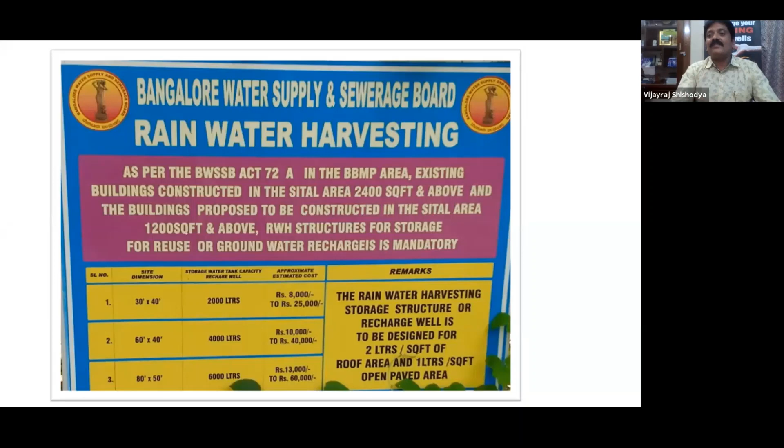He has not understood. I was in Calcutta under a metro station, and it was raining that day. A tanker was coming and feeding one of the hotels there. And in front of his hotel, from a 6-inch pipe, the whole water was gushing out. He's paying for the water, and the same water is gushing out and causing waterlogging somewhere. So people have not applied their mind, though it is not rocket science. The application of common sense has not been done.

With the new buildings coming up with hollow blocks, people have generally started using hollow blocks. If the clamping system is not properly fitted, these pipes come out. We have seen that within 1 to 1.5 years of installation, these pipes generally come off, and the whole system has gone for a toss.

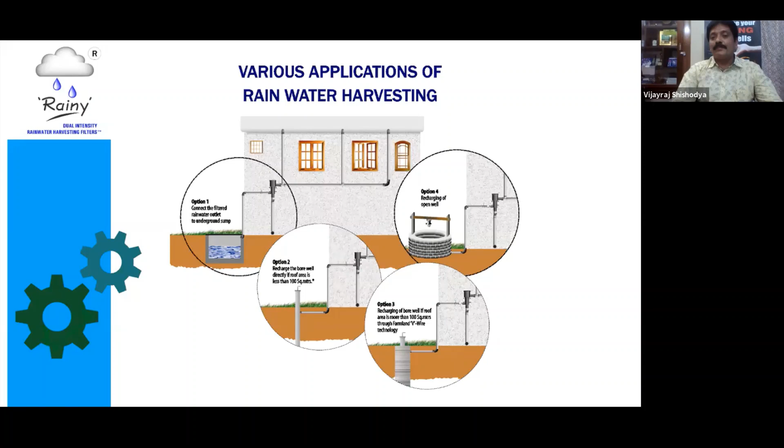Second, in urban areas, wherever we are putting it in the public domain, we are generally using conventional filters, wherein all the dust, debris and leaves come and settle down. So if you are not able to clean after every rainfall, they start decaying. Or a thin layer of fine dust is formed that restricts the water from flowing down to the filtration bed.

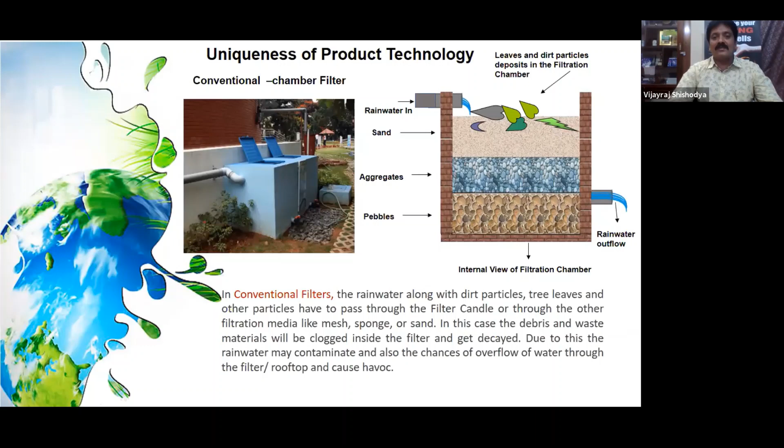So there is regular maintenance, because of a lot of trees and leaves coming down. Every time you have to go and remove them, which in urban areas becomes very difficult, and in the public domain, particularly in hospitals, schools and all, they don't maintain it properly. Then it becomes obstructed. In every filter available in India, you can find there are ball valves here. You have to open these ball valves after every rainfall, or frequent cleaning has to be done to drain out all these leaves, dust and debris. If not done, the whole system gets into trouble.

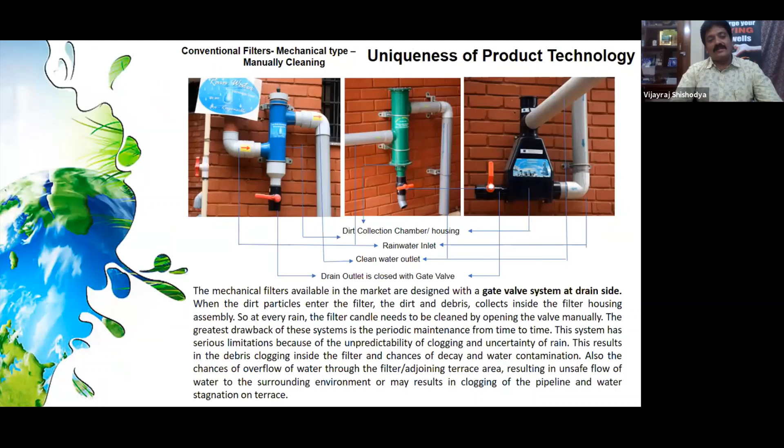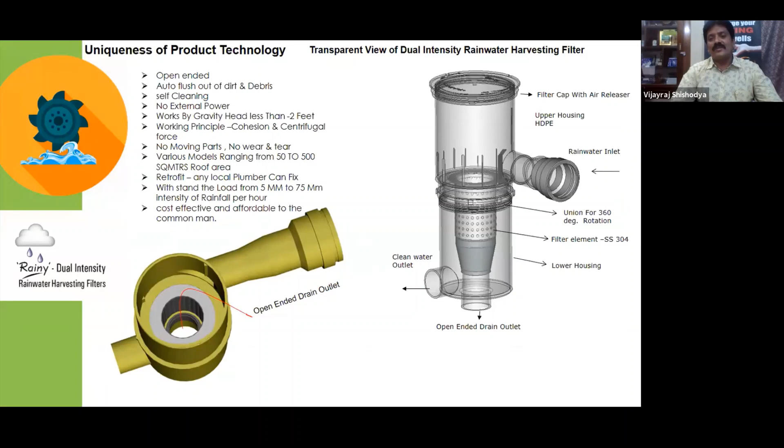So, to the contrary, after extensive research, a filter has been developed which works on centrifugal force and cohesive force. All the water that enters this filter, all dust and debris is thrown off, and the clean water comes out on the other side. So the maintenance becomes less. Here the ball valve is provided at the clean water outlet, so that you can do the first flush, but not in the drain water outlet, where all dust and debris falls out automatically. One more advantage of this filter is that the first 90 seconds of water always goes out, then only the water starts coming in. So the first flush also takes place.

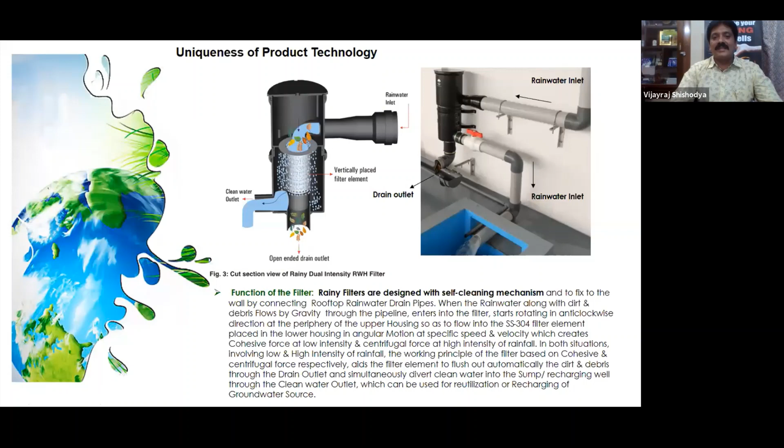Now coming to the installation part, as I said earlier, every 1 meter these kinds of L clamps have to be provided. And the proper gradient has to be given: for every 50 feet, at least 1 foot, a 1:50 gradient. If there is sufficient gradient, there will not be any choking, and we get enough height because of the water column. We are getting the water from huge heights. If proper gradient is given, there will never be choking.

And the selection of the pipe is very important; it is the main priority. When you are joining the pipes, you have to see what kind of water flow we are getting and calculate the free flow accordingly. On an average, for 25 mm of rainfall, 1 square foot of roof area gives about 2 liters of water. So 1000 square feet of roof area gives about 2000 liters per 25 mm. But when designing the system, it is always better to take the rainfall intensity at 50 mm. The whole system should be able to sustain 50 mm of rainfall. Then implementation becomes easy and sustainable.

We have implementations done 20 years back that are still working fantastically well today. So for implementation, one is the diameter of the pipe, calculated for about 50 mm of rainfall, so 1 square foot we take as 4 liters, and the other is the tank size. Generally, according to the international standard, 50 mm of rainfall. If you have 1000 square feet, 4 liters per square foot into 1000 square feet is about 4000 liters. So the minimum tank size we require is at least 4000 liters for rainwater harvesting. Generally in Bangalore, we have seen that people are using the regularly existing sump only.

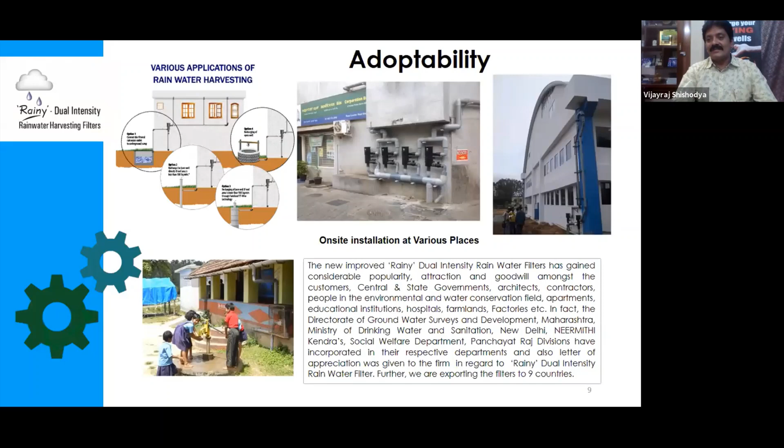They're filtering the water, putting this water into the existing sump only. From there, overflow is sent to the borewells. Likewise, we have to design the tank size.

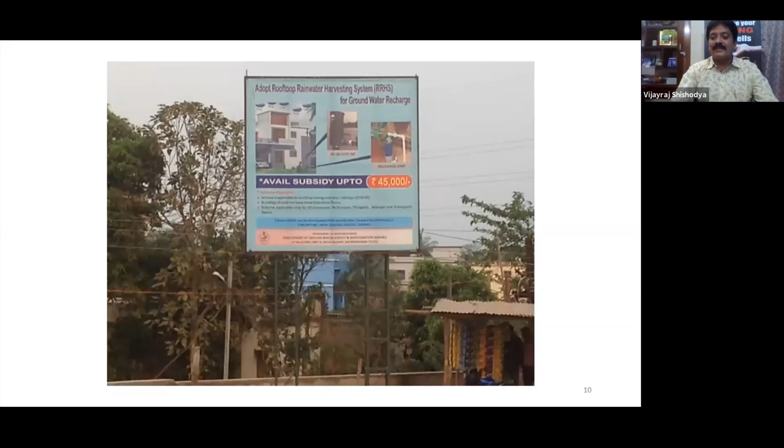Here, many of the states have now awakened to rainwater harvesting, and they have started giving subsidies. One of the first to announce the subsidy for rainwater harvesting, piping, as well as the filters was Bhubaneswar, Orissa, wherein each and every house was paid 45,000 rupees as subsidy to implement rainwater harvesting. We installed more than about 2 lakh installations over there with our wide network, and we trained plumbers also. So they have implemented more than 2 lakh installations in Bhubaneswar.

And coming back to the agriculture field, generally what we see is, per acre of land, with just 25 mm we get 1 lakh liters of water. Out of that, 20 to 30% percolates. The rest all goes as runoff water. During runoff, there is one more loss we are incurring, because when the water runs off, it is taking the topmost soil also. So the farmer is deprived of the top soil. The top fertile soil is also going.

If you are able to do rainwater harvesting properly in the farm, which doesn't cost much, with minimal investment, they can do rainwater harvesting. Even at 500 mm of rainfall, if you take the lowest, except for a few parts in Rajasthan and Gujarat, even in the majority of the areas of Rajasthan you get about 500 mm of rainfall. So on average, on an acre of land, 20 lakh liters of water is falling. Out of that, even if you take 30% as loss, still you're able to get about 14 lakh liters of water.

If you are able to save this water, because even in most drought areas, once in 3 years you have flooding there. So during the flooding, if you are able to push this water into the ground, then we can recoup it back. One of the best examples, we did it in Hyderabad, in the Gachibowli area, which is on Deccan Plateau rocks. We had hard rocks there, and water is available at more than 1,200 feet.

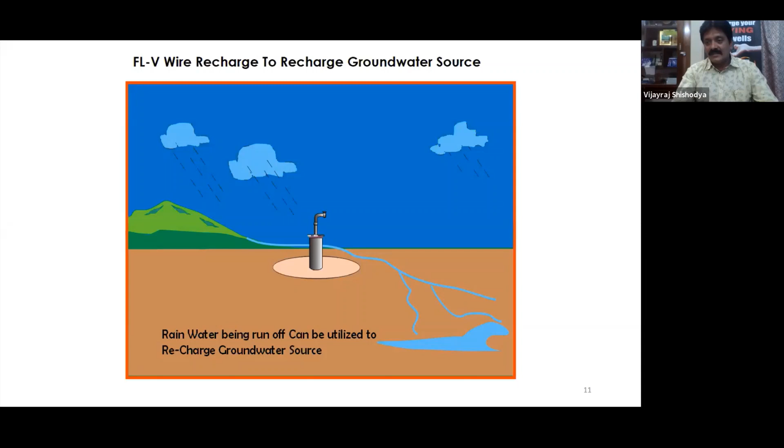So generally, everywhere it is advocated that we should make pits and leave the water. Pits are very good for subsurface recharging. If you have open wells and you make continuous pits, it will help you get water for the open wells. The subsurface will be recharged. But with the advent of time and borewells, we have forgotten open wells. All our open wells have become dustbins.

If we are able to revive our open wells, we will be able to get water in them for about 8 to 9 months. Only because we were not getting water for the last 3-4 months, this well system started failing. People started forgetting the wells. But now what we suggest, as Vishwanath always suggests, is that we should go for 1 million wells in Bangalore, so that you can avoid flooding and the whole water table can be brought up. You need not bring water from anywhere else. You will have sufficient water here. There will be no water logging.

So likewise, these recharging pits, which have been advocated everywhere, can be used for subsurface recharging. But after 20 feet, 40 feet, the water doesn't percolate, because we have clay mixed soil in the majority of areas, and then we have rocks below. So the water is not reaching the aquifer, meaning this is not recharging our borewells much.

For example, we have many lakes here which are more than 25 or 30 feet deep, with water 365 days. But in the vicinity of those lakes, we don't find water. The borewells are as deep as 1,000 feet. This means just by putting pits, we are not able to recharge the borewells. Here in the injection well, you can see on the left hand side of the screen the injection well concept, wherein you have a proper silt trap system.

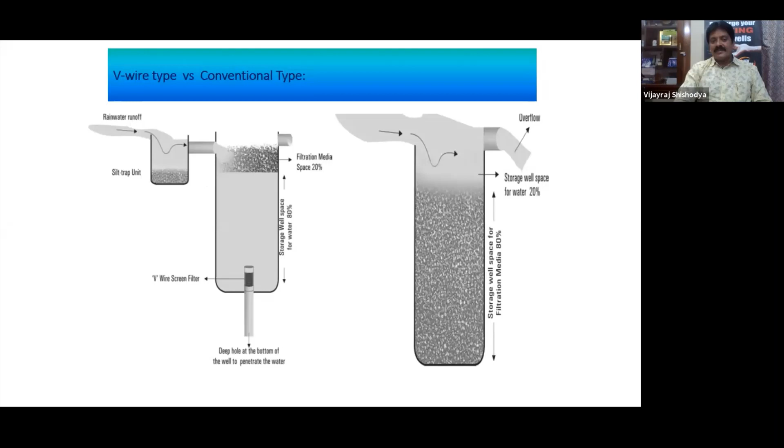At the entry point and the bottom point, we provide a V-wire screen, a special component which is flat externally and V-shaped internally, so that a lot of water can enter but it doesn't allow sand and dust particles in because of its formation. Huge volumes of water can enter through this.

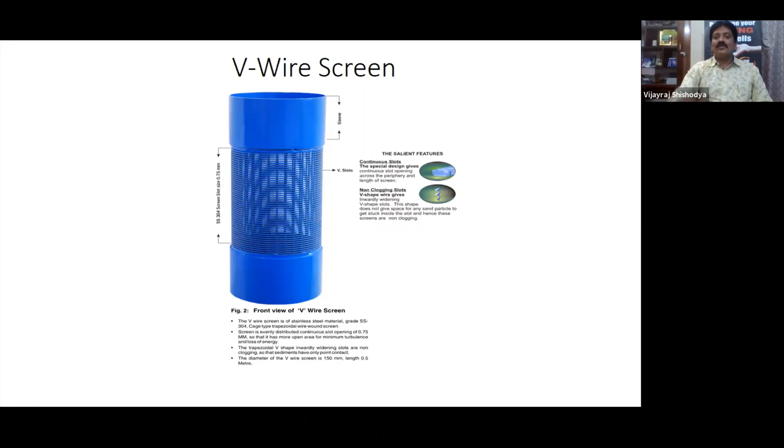This is the typical injection well. You can see here the water flowing, with channels made so that you can supply this water to the silt trap. From the silt trap, the water is allowed to pass into the main injection well.

Here the filtration media is only at the top. We fortify this filtration media using chlorinated activated carbon. We use charcoal, then silica sand, then pebbles and so on. So we fortify this filtration media, and then the whole well is kept empty, so that it can store the water, and then slowly the water can percolate.

This acts as what we call an injection well, because it creates a kind of water column due to its height, which helps in pushing the water into the deeper layers. When you measure this pressure at the bottom, we get about 4 to 5 bars of pressure which can push this water into the dried zone, and thereafter it gets filtered through the earth crust and goes into the deeper aquifer.

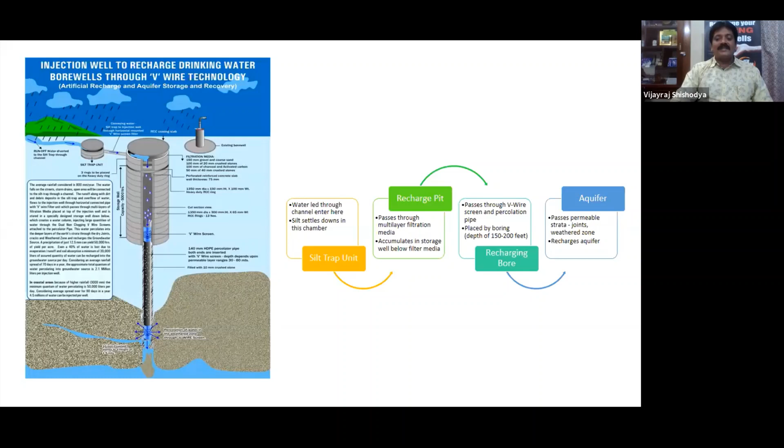We have installed more than 18,000 injection wells in the last about 18 years we have been doing this. It has been very well accepted, and it is located next to the drinking water borewells, about 18 to 25 feet away depending upon the geologist's advice. Many of the drinking water borewells in the Government of Karnataka's rural drinking water scheme have adopted this technology, and it has been very successful.

You can see here, this is a typical picture of how this injection well works in the field. If you had seen this nala, otherwise it would have taken this water along the gradient. The water would have just flowed beside the borewell. This is the drinking water borewell here, which supplies water to a village. The water would have gone down to the low-lying area somewhere down there.

Now what we have done is, after the proper geophysical survey, the whole water is now allowed into the silt trap, which is constructed in the storm drain only. There are a lot of pits made before this, so that water enters into the pit, and by the time the water reaches this area, it is pretty clean. This water enters the silt trap, and from here the water goes to the injection well.

Because it is nearby, it is just allowed to go to the first permeable zone, and thereafter the water gets filtered through the earth crust. If you take 1 meter by 1 meter of compressed earth, that compressed earth is the best filter compared to any other filters available on earth. When the water passes through that compressed earth, any impurities left over can be filtered, and then it slowly takes its own sweet time to reach the aquifer.

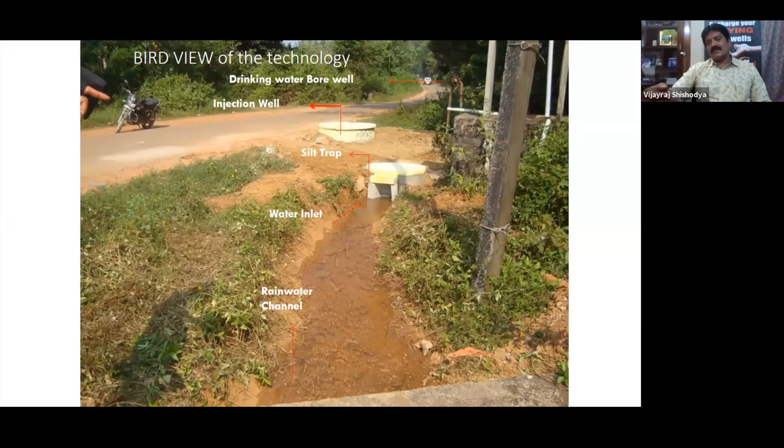By that time the water is pretty clean. These are the first of its kind rigs in the world, probably only two. Rigs are generally meant to remove water from the earth, but these are the first two rigs developed specially designed to be the only rigs in the world meant only for recharging. They are used only for recharging, not even a single drop of water is removed using these rigs.

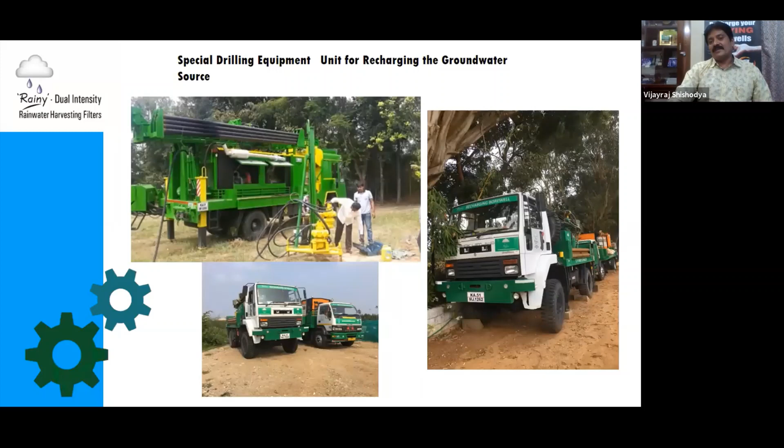So these are the kind of equipment that have been specialized and developed so that we can achieve a perfect result. These are a few of the case studies we'll be discussing, both in urban areas and in rural areas, where this kind of injection well has been installed, using the whole of the surface runoff water.

What we do is, when the surface runoff water is taken, we ensure the entry point accounts for about 1 or 2 inches depending on the calculated catchment area, so that the first bit of rainfall drains out. Only after the water rises a little does it go in. Then a proper filtration media is installed, and the water is taken care of.

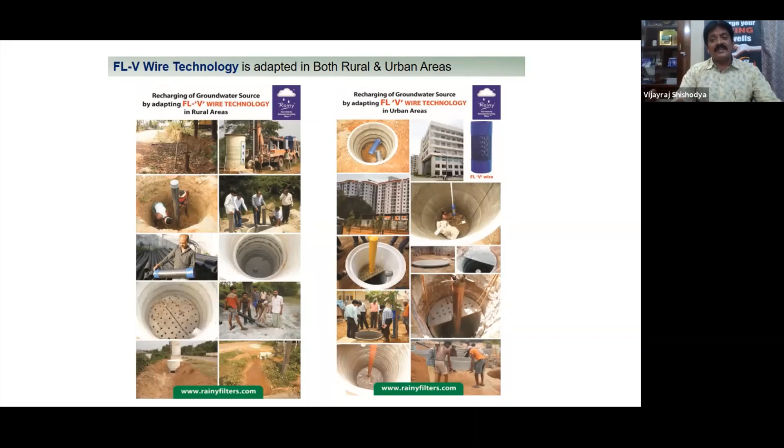We have seen injection wells able to take anywhere from 3,000 liters per hour to about 2 lakh liters. One injection well we did for a nearby village in Tibegur had a potential of taking 2 lakh liters per hour. That was the kind of potential it had.

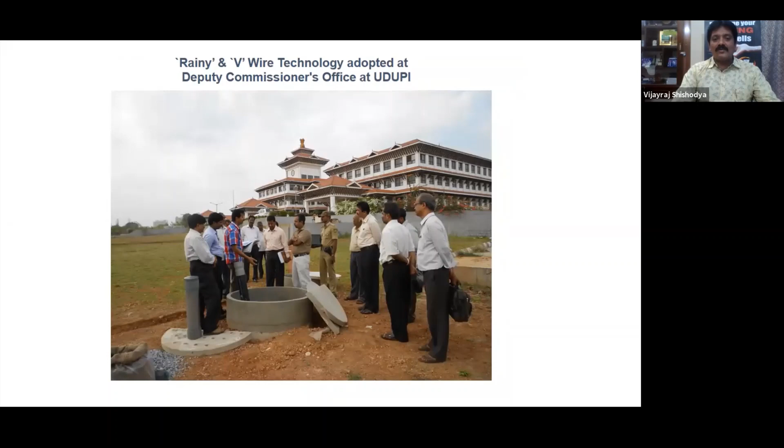This has been installed in all major districts of the country, where it has been proven and then taken into different applications. This has particularly now been used even for water logging, which we'll discuss later.

This is a case study of a rural agricultural bore that had dried up, for a farmer named Bettamaraiah near Tumkur. When we met the secretary for water at that time, Mr. Naveen Raj Singh, and gave him a presentation, he said, 'I don't believe your presentations. I want one practical demonstration. I'll give you one dried borewell - if you're able to rejuvenate that, then I'll believe this technology is successful.'

This Bettamaraiah had about 2 acres of land with three borewells, all of which had died. His son had moved to Bangalore for work because the borewells weren't working. So we took up his borewell as a pilot study, and he said he would personally monitor the system.

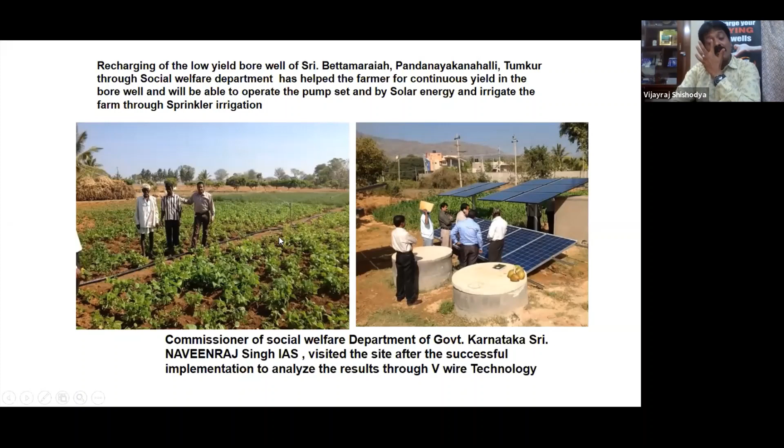This is how it was successful, and thereafter he became one of the people who advocated for these injection wells everywhere he went.

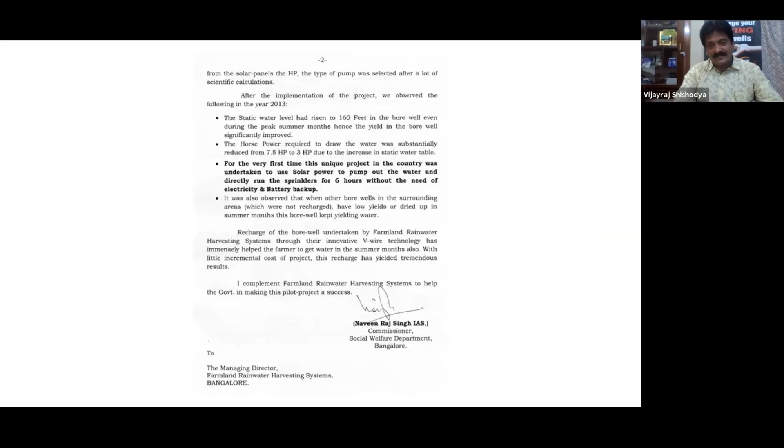These are rooftop installations, where the entire rooftop runoff, after proper filtration, is used for drinking in an IT industry. People have some apprehension about drinking this water, but if it's given proper treatment and passed through common means, it's safe. Our Shivakumar sir has been a living example for over 20 years - he has been using this water alone, and he is healthier than any of us.

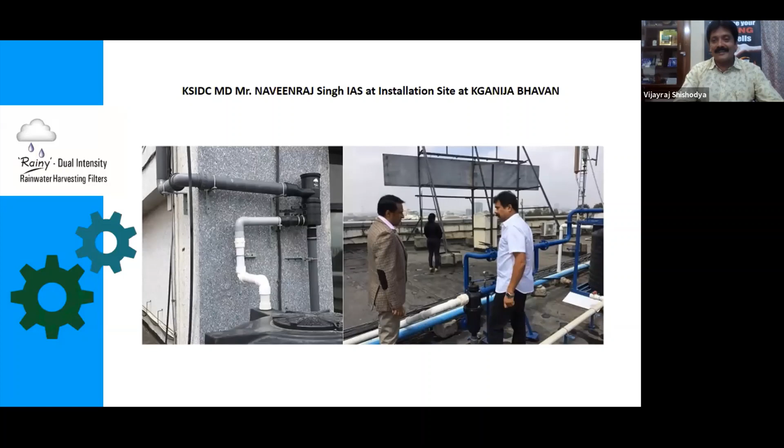These are some rural installations. Many rural borewells have been installed with this kind of system. This is a CEO in Chamarajanagar where we installed more than 240 injection wells. A team from Times of India visited because we had applied for an Earth Care Award, and they wanted to visit and verify on the ground.

A team of 12 members came, including an eminent scientist. Everyone visited - we had done the installation in 2010, and they visited in 2012. They could see that only the borewells adopted with our injection well were working, because those two years were drought years with very scanty rainfall. Only those borewells with this injection well were functioning.

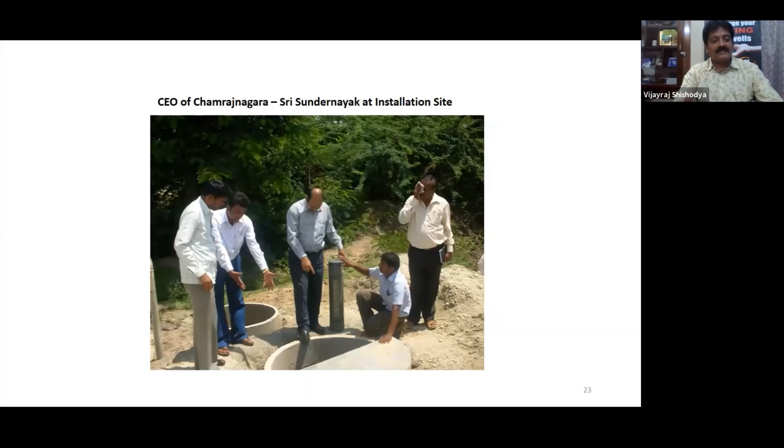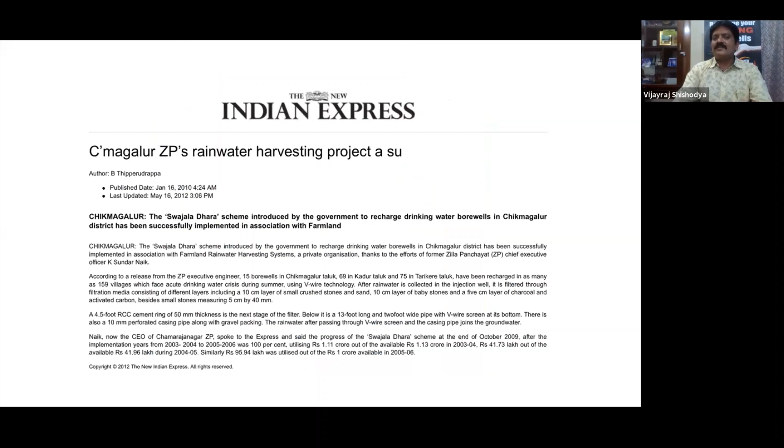So in this we got an Earth Care Award, and Times of India was even awarded 5 lakh rupees cash prize for this. This whole thing, the majority of the villages they adopted, and then they were extended. So this has been tried and proved.

Now what generally happens in urban areas, you see these software companies have huge campuses of 300, 400 acres sometimes, with a lot of water moving out of their campuses. Majority of them have more than 10-20% paved areas, then buildings, and the rest open area. But still, because of the lot of movement of water, there used to be huge wastage.

So we have installed this V-wire screen in these areas also, then recharge. One of the IT sites in Chennai, with 25,000 seats, 40% of annual requirement is met by rainwater. That is one beautiful case study, in Mahindra City, wherein with 25,000 seats, 40% of their annual water requirement is met by rainwater alone.

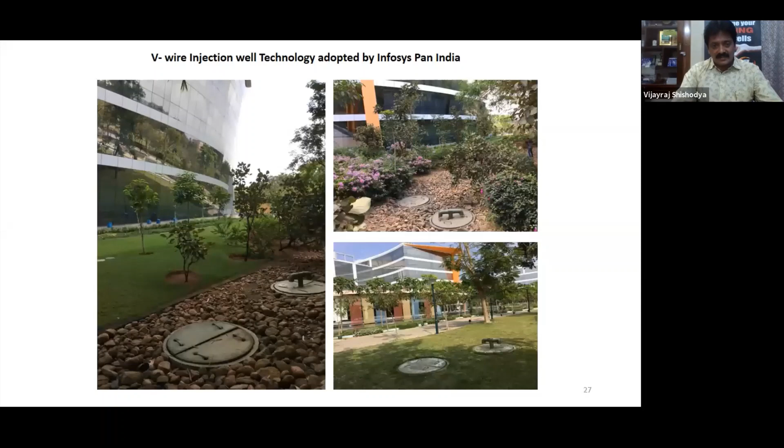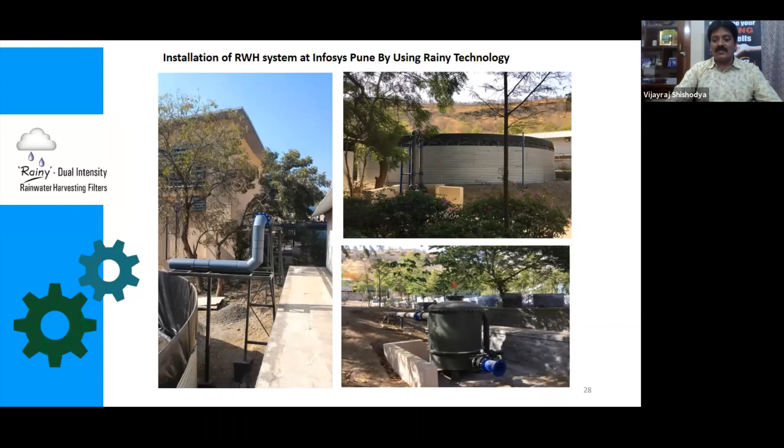These are the low costing tanks we have adopted for rainwater, because return of investment is now being calculated by these companies. So unless we are able to break down their return of investment, and we are sure that it is one of the best returns you can get, even compared to gold, bank, or any other investment. We have seen that their return of investment on huge structures like this is 3.5 years, because they are buying water from outside. Their cost of water per kiloliter is around 100 to 150 rupees. So they are saving huge water cost, and within 3 years they are getting their return on investment. So that is one of the factors.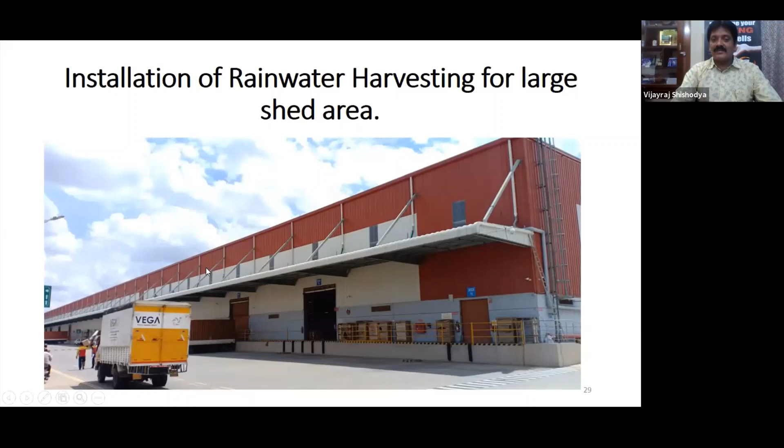One more thing we have to take care of is, when going for large installations like this, we have to provide the overflow system. You can see here there is an overflow system. This is very important because it will act against air blockage, since when you're running pipe of about 1 kilometer, 2 kilometers, lot of air blockages will be there, or even if you're crossing 100 feet, there needs to be an air vent. So if you provide these kinds of overflow pipes, this will act as an air vent also.

You can see it is raised a little above and then lowered again. So whenever there is a heavy downpour, because recently in 3 hours we got about 104 mm of rainfall, in those kinds of situations, or if there is a cloud burst, this water will not damage the pipe. This is a safety system that should be adopted in each and every installation. For small houses it is okay.

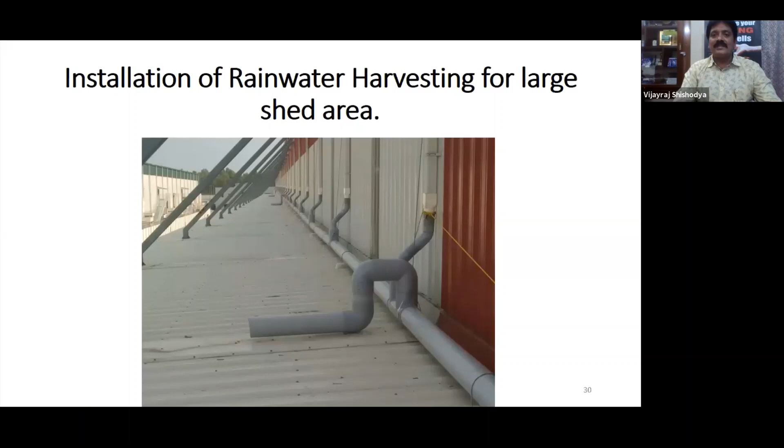We have another 5 more minutes for the presentation.

Yes sir, yes sir. So this is also one of the factories, one more factory where you can see all the water is brought into one chamber jackwell system. From the jackwell system, it is pumped. These are the bigger kind of filters, about 500 meter cube, 100 meter cube. 5 lakh liters of water can be pumped in 1 hour. That kind of filters are custom made by us, and we can use it for this.

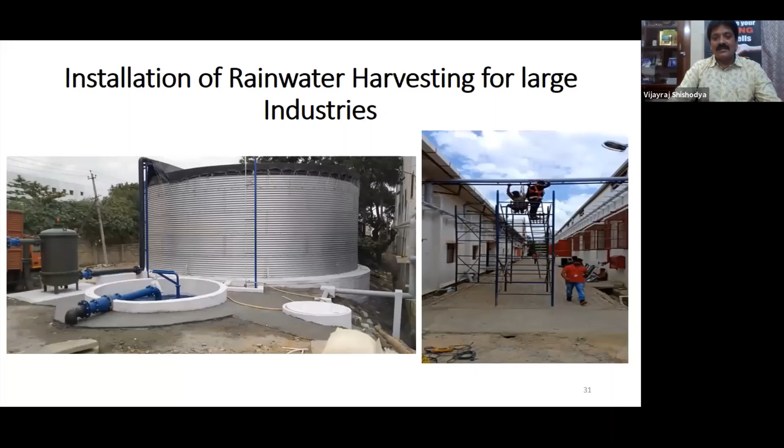This is one of the garments factories wherein they had a water crisis. Today they are water self-sufficient. We are putting water meters which are a crucial part of our installation, because anything which can be measured can only be saved.

So you can see this water meter has been installed, and we try to use a lot of HDPE pipes, because their durability, their life is more than 40 years and they are non-carcinogenic. And this, you can see the air vents here. I have shown you this because of easy installation; once the clamping system and the air vent system are in place, nothing can happen. A system can run up to 40 years without any intervention.

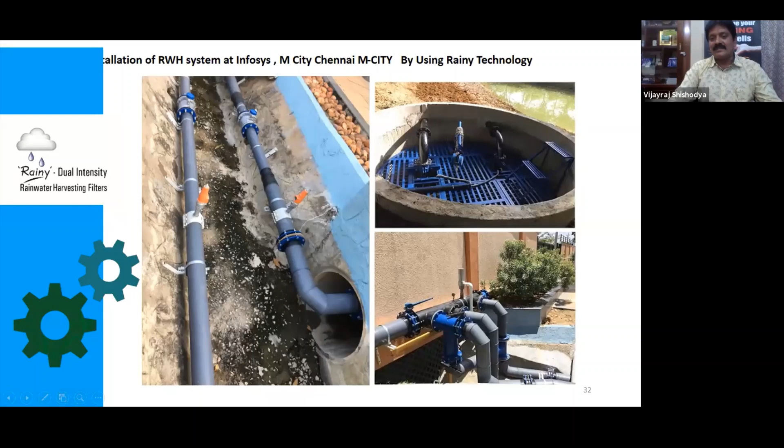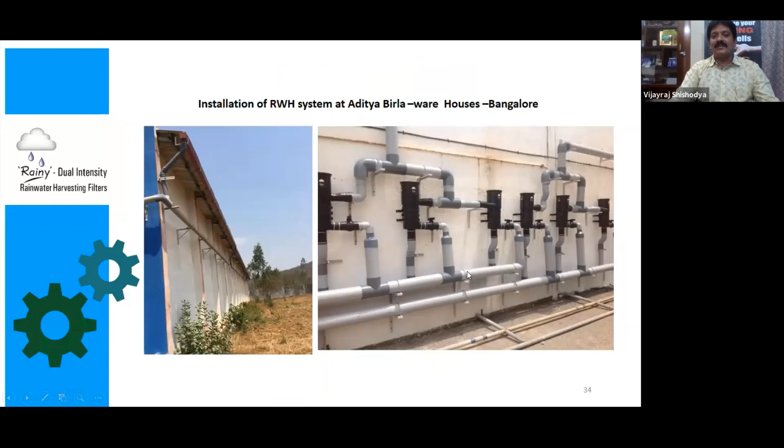Here on this right hand side, you can see the jackwell system, wherein the whole pumping system is there with all the precautionary measures, which pumps the water to the filtration system. These are the customized filters for the larger areas, and when you have smaller areas, you can have parallel filters. You can install a lot of parallel filters like this, run them into a main line, and then water can be let in. We have installed, in Karnataka alone, more than 3,600 schools.

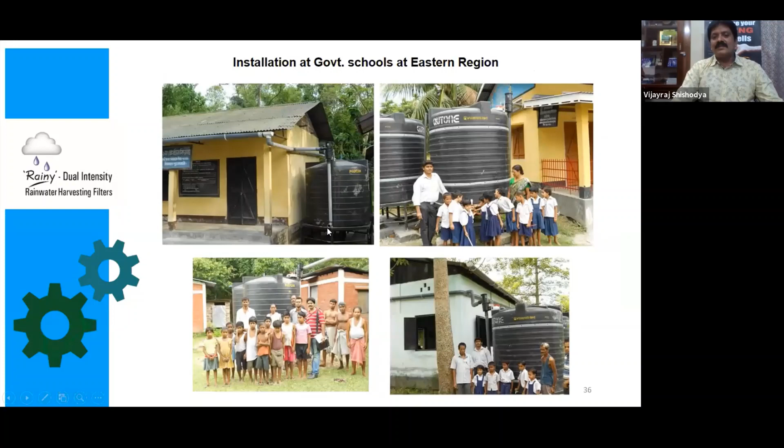These are done in Assam, wherein the whole rooftop water is brought, the tank is on a stand, a 10,000 liter tank is proposed, and the filter is put at the top, so that they can use this water. These are in individual houses. You can see, there are a lot of benefits.

We have done it in all the railway stations in Madgaon, the Konkan railway zone, where from February onwards they had a lot of salinity problems in their wells. Though they had enough rainfall, about 3,000 of rainfall, after the summer season, because of the laterite and being near the seaside, there is a lot of salinity ingress into the wells. So we installed this rainwater harvesting system in all of their railway colonies and railway stations, and this water was let into the wells. So we could avoid a lot of seawater, salinity ingress into the wells.

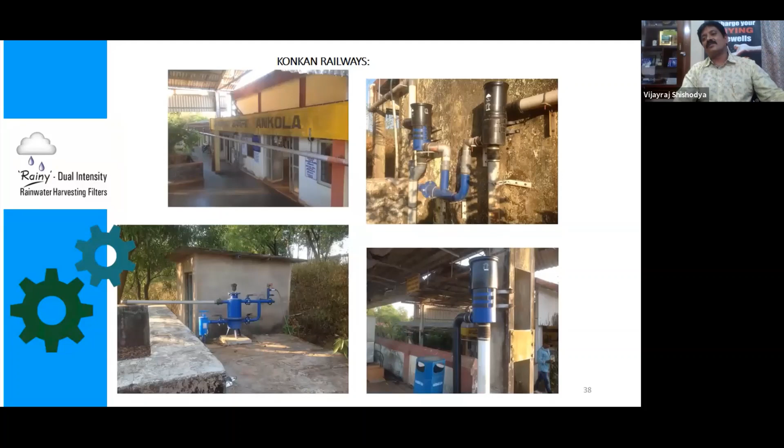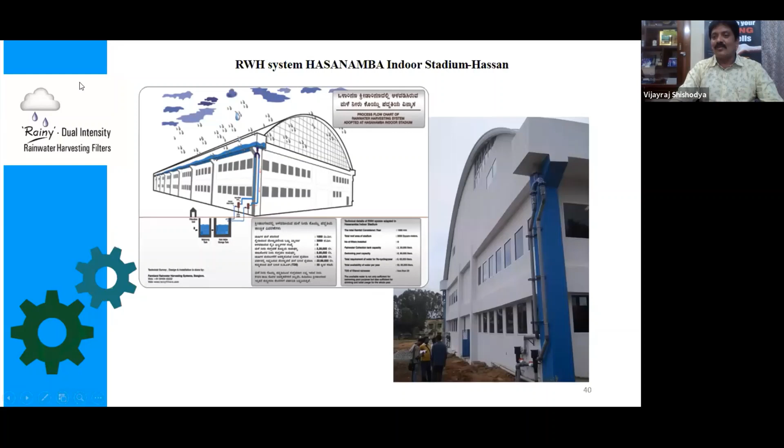This is one unique indoor swimming pool in Hassan in Karnataka, wherein this swimming pool, like our Shiv Kumar sir's, doesn't have any water connection. Though it is a swimming pool and requires a lot of water, they don't have any borewell and no connection, only the roof water. They have made a 2 lakh liter sump, and all of the water is brought and stored in it, and they have excess water which they give to the society nearby.

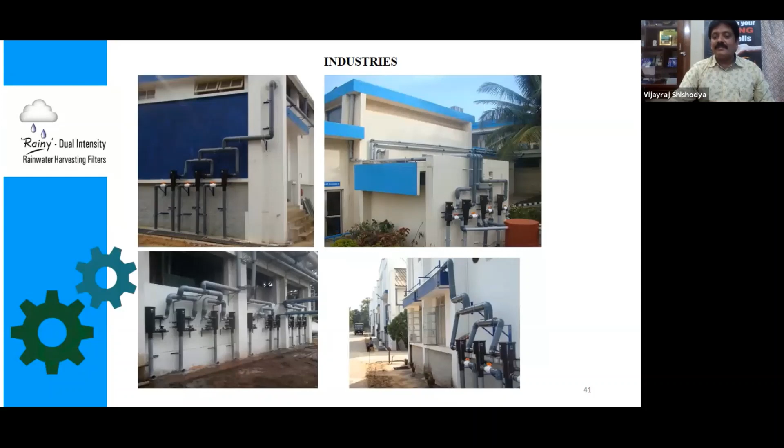These are in a United Breweries factory. You will be surprised to know that they use this water for making whiskey, because they need not treat the water, since, as you all know, rainwater has very low TDS and is demineralized water. So for them, the treatment and the wastage of water is less. They have made a 4 lakh liter tank to store this water, and they just do primary filtration and use it for their process. So they are saving on huge processing cost, electricity cost, and water wastage. Because when you make demineralized water, 50% of the water goes waste, as you all know. This can be saved.

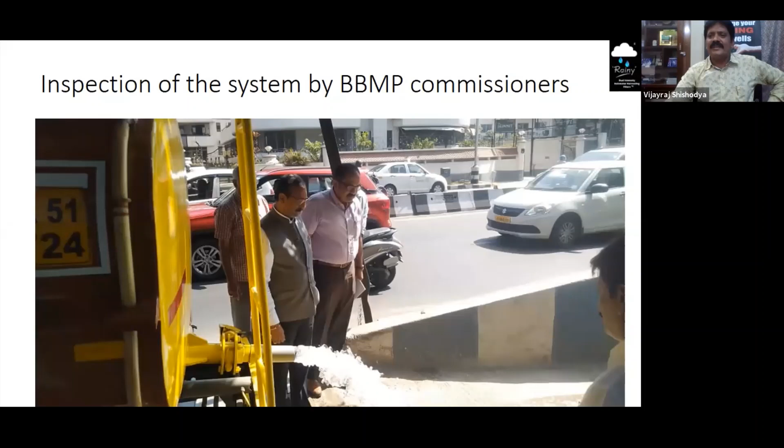And one more utility of the injection well has now been found in urban areas. You can see our present Bangalore Commissioner, Mr. Anil Kumar. In all the urban areas, there is a lot of water logging in the cities because we don't allow any place for percolation. So underpasses generally get hugely flooded, and then the movement of people is a huge problem.

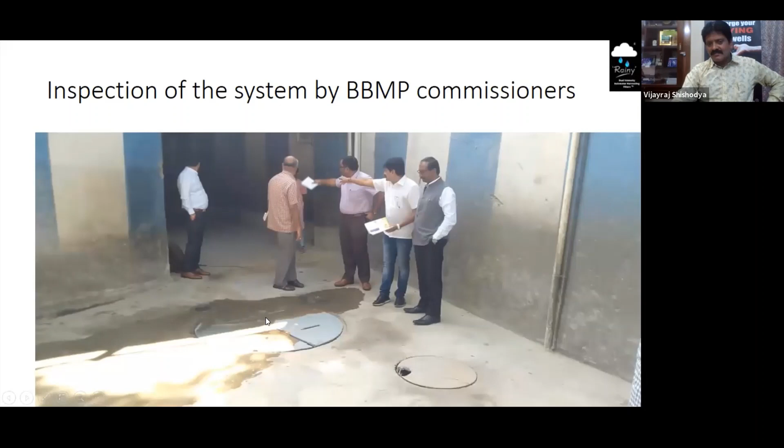Here you can see what we did was we installed one injection well in the underpass. In the underpass, we installed the injection well. This is the silt trap. This is the oil and grease chamber. And then the injection well was made.

So now whenever there is a rainfall, not even a single drop of water accumulates in this underpass. Otherwise, earlier they had to pump every time it used to rain, and during heavy rainfall there was always a power cut because of trees falling, and there used to be flooding and a lot of loss to life and property.

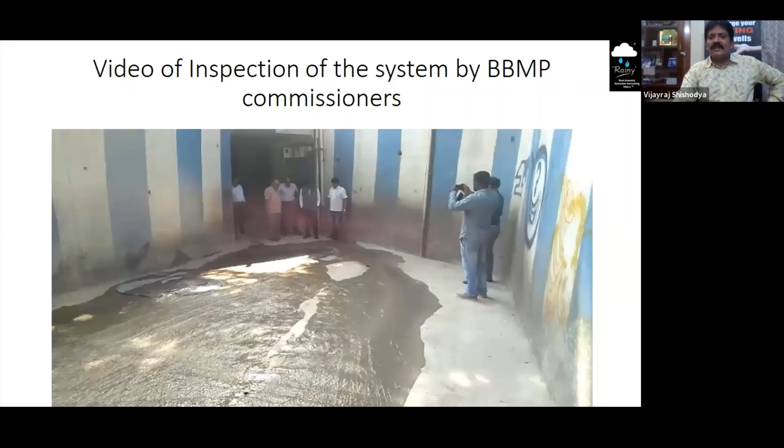Now it has been taken up as a pilot project in the majority of the underpasses. It has been installed, and it has been taken all over pan India. These are a few photographs showing that it has been widely accepted at different places.

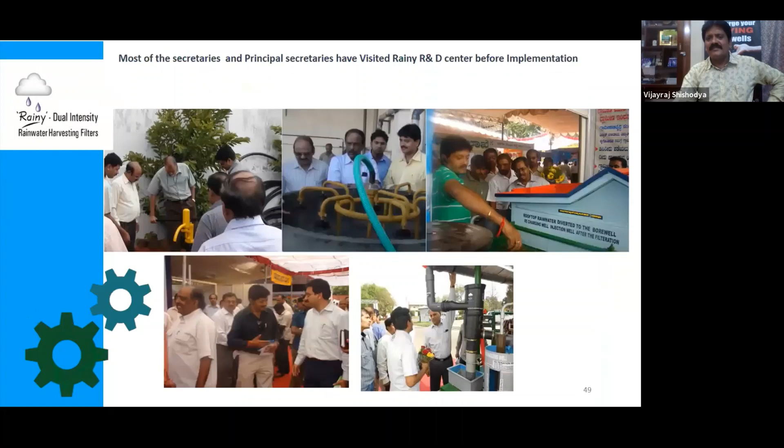We have got one research station at Chikmagalur where we are training people who want to learn rainwater harvesting, because as rightly said earlier by our professor sir, today it is a very good business opportunity, and we need millions of people who become rainwater warriors and business entrepreneurs. We don't need much money today. They can just come and get trained. They hardly require about 5,000-10,000 rupees to start a business, and they can earn very good money.

People are making a career out of this, and it is in the interest of the nation also, because one trained plumber, even if he does 100 houses, we are saving 1 crore liters. One plumber can do that. We need these kinds of people. So we have got a training center at Chikmagalur. Anybody can be trained free of cost. A research center is there. We train them, and we encourage them to take this up as a job.

If anybody is interested, kindly share our numbers. They can come; their stay and their food will be taken care of. They will be trained, and they can go back to their cities and be a water warrior there. They can be a rainwater person who can implement rainwater harvesting. They can educate the people. They can be a mouthpiece for rainwater harvesting. This is how we can solve the water crisis of India today.

With 1,170 millimeters of rainfall, India cannot be water starved. If anybody says today that India will be water starved tomorrow, I don't believe it. I am very confident India will be water surplus with the kind of efforts our ICCW has been putting, and the efforts Dr. Rajendra Singh, Shiv Kumar sir, and everybody are putting. We now need people who can work on the ground. We have to prepare persons who can implement them. So now we have to work towards that.